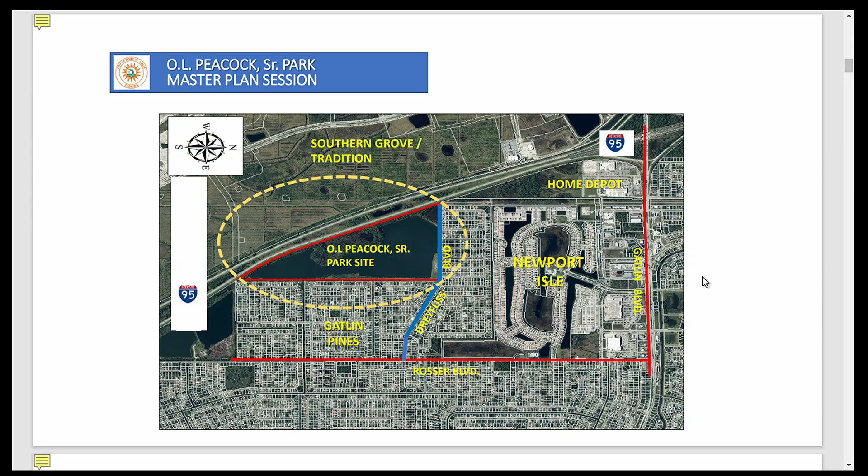By way of background, the OL Peacock Park is located in Western Port St. Lucie, adjacent to I-95, a little bit west of Rosser Boulevard along Dreyfus Boulevard, south of Gatlin Boulevard. The site is 165 acres. Don't let that get you excited, because 102 of that is water. It's an old borrow pit used to develop much of Port St. Lucie in the 1990s and early 2000s, closed out in the latter 2000s.

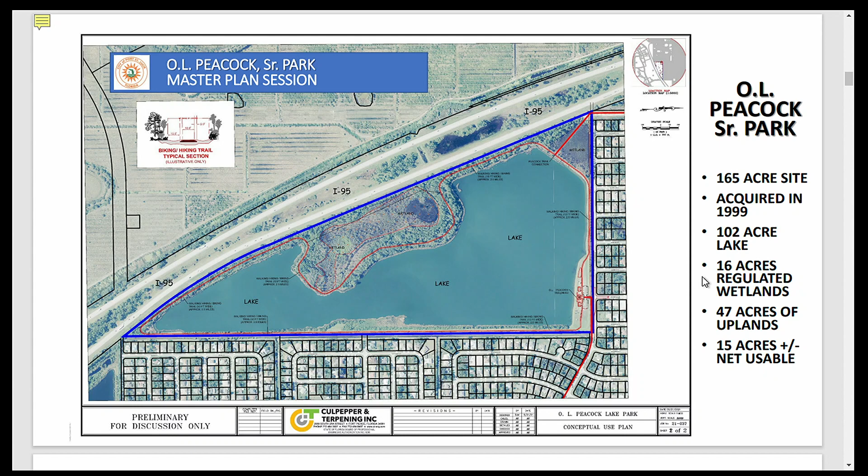There are about 16 acres of wetlands existing on the property, and 47 acres of upland. But again, looks can be deceiving. Of that 47 acres—and this is what makes this site a challenge—only about 15 acres are considered net usable acreage.

Back in September, we held a community workshop, similar format, where we asked participants a series of questions about what they would want to see on this property. Survey comments were collected via online submission from September 2021 through October 13th, 2021. The objective was to give the city guidance on how we should program the various improvements at this facility.

The tables you see in front of you are a summation of the various comments we received, and there were two broad categories of questions asked.

What activities would you like to see at the park, and what amenities would you like to see? They're similar but different. Activities are things you go out and physically partake in. Amenities are the physical improvements that allow the activities to take place.

Looking at the listings and identification of comments, there's generally a consistent comment about having a park that provided walking, exercising, and biking opportunities, areas for simple gatherings, community, neighborhood, and family gatherings, and kayaking and canoeing on the lake. The lake does permit non-motorized watercraft to access it, and it's seen as a general enhancement for the area.

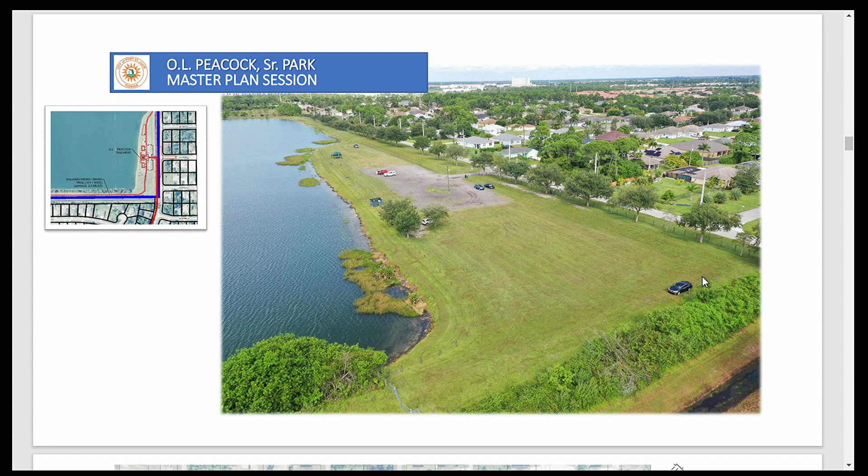There is a relatively large earthen berm along Dreyfus Boulevard with a number of mature oak trees growing into it. This area will be the foundation for the development of use activities within the park. We've divided the area along the north end of the property into two general planning groups: the east area and the west area.

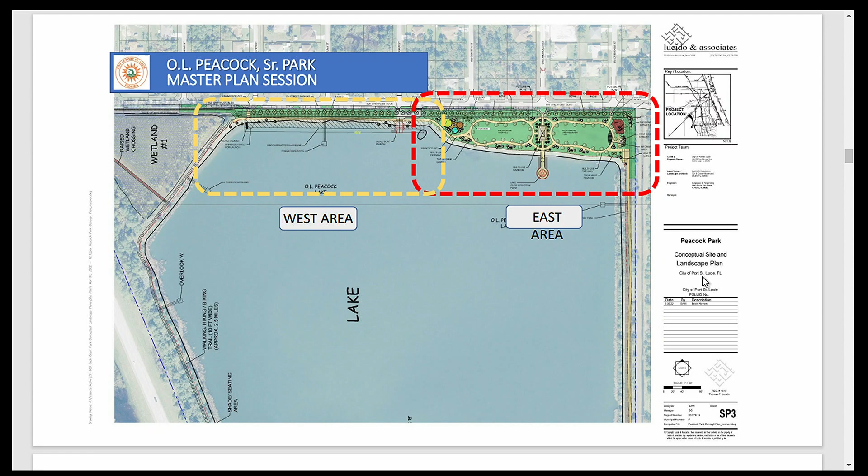The east area is essentially that portion of the property from our east property line over to where our land masses end, when you look at the site. This is the most developable portion of the property, and it's the one we're probably going to start with as we advance forward with activities.

This is the concept plan for the east area. It provides for a community pavilion, playground areas, exercise areas, water overlook areas, seating and walking areas throughout, plus general open space.

Now, one thing you'll see if you go back an image here, you'll notice there is a large unimproved area, and I'm not getting my laser... there it is. There's a large parking area that sits right here.

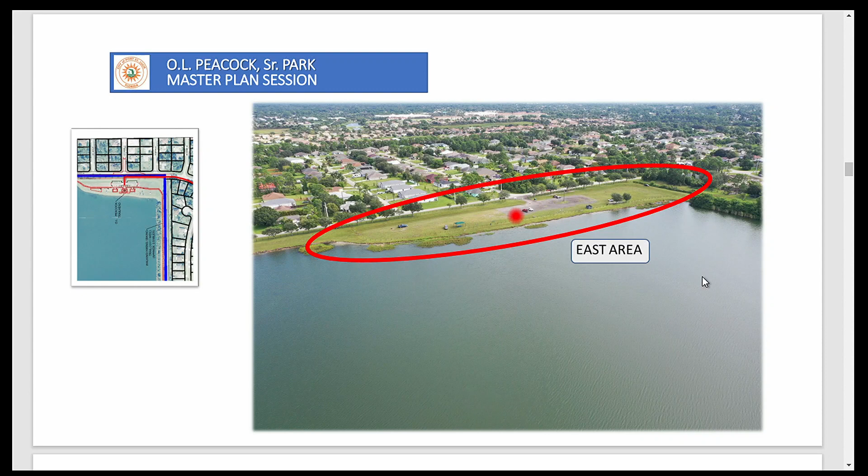When we advance back, you'll notice there is no parking on the property. That's probably one of the most significant design elements we've had to address with this facility. This plan proposes taking the existing millings parking areas inside the park that take up valuable space in a limited development area and moving them to the perimeter of the property.

This plan proposes constructing a series of on-street, parallel parking areas along Dreyfus Boulevard that will serve as primary parking for residents who cannot walk or bike to this facility. The highlighted red circles show the first areas of on-street parking. The center circle indicates where the existing driveway will be removed, and a small entry area will be proposed for landscaping improvements and construction.

As we advance through the initial stages of development, we'll have a center core of the park area with a community pavilion that can be available for use by community groups, or leased or rented for family activities. To the left and right, we'll have a child's play area on the right side with restrooms, and on the left a future athletic sports court area.

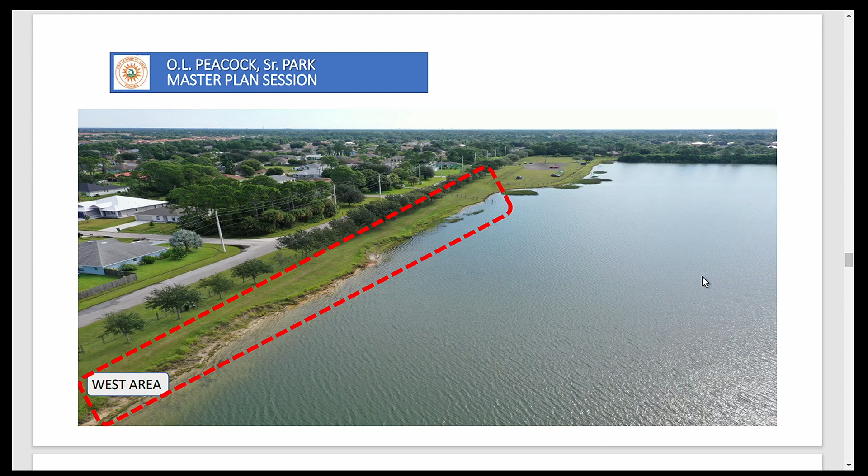That's where you see these various escarpments alongside the bank and through here. This is the area where we will, over time, be reestablishing the shoreline, regrading it out, and also providing a non-motorized boat ramp facility, a kayak launch facility, and constructing some small fishing piers for folks who wish to come out and partake in fishing. You'll also note there will be additional on-street parking added in this area.

And as I mentioned a moment ago, the ramps will be installed in these particular parts. Now that takes us across the northern portion of the property, which is the most heavily used and is likely to continue to be the most heavily used as the project develops in the future. However, as I said earlier, what I consider to be the gem of this property is the perimeter trail.

I'll touch on this. The perimeter trails go around the lake, and those will be in the latter stages of development. As previously addressed, that would provide a paved trail system that can be used for biking, walking, or hiking, with rest areas along the perimeter, open for the general public to come out and enjoy.

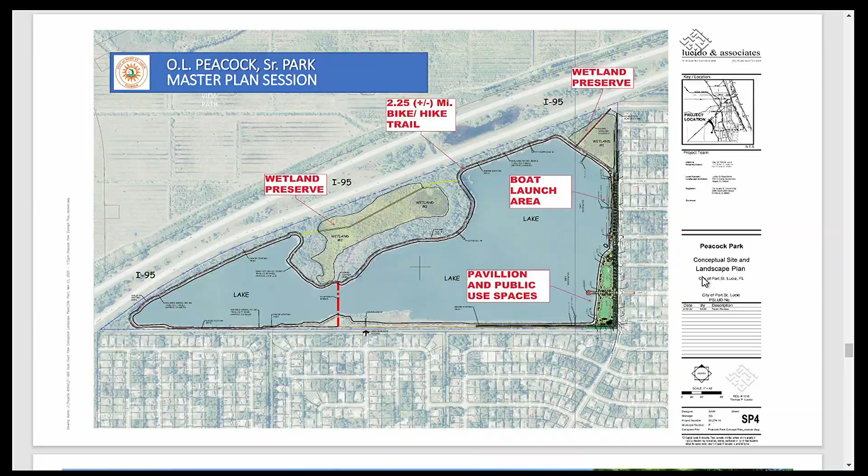Now, once we get from the concepts of the art of a master plan, where we identify and get away from the what-ifs and the pictures are put together, the next critical phase is called program scheduling. Program scheduling is where we begin to identify when we expect things to be built and how we expect to pay for them. This particular project has from the outset been envisioned as a multi-phased, multi-year project. Because of its special characteristics, it will have to be developed incrementally to make the most effective use of available resources.

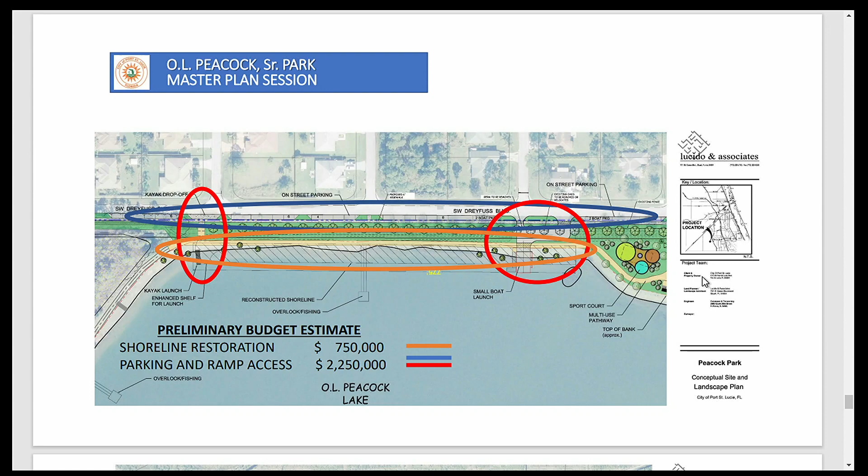When we're all said and done, the parking along Dreyfuss Boulevard will be approximately 30 to 40 vehicles. There will be ADA access for all vehicles along that entire corridor, and that includes both the east and west areas as well. That should be enough to handle most activities within the park itself.

Then we go to the trail and the piers. Now, these are going to be expensive construction items, there's no question about that. But these are the projects that create the destination value for the particular park.

Current estimates are somewhere between $3 and $3.5 million to come in and construct 2.25 miles of trail, plus associated bridging and docking systems. As I said, all of this will be dealt with in finer detail once we move into construction plans.

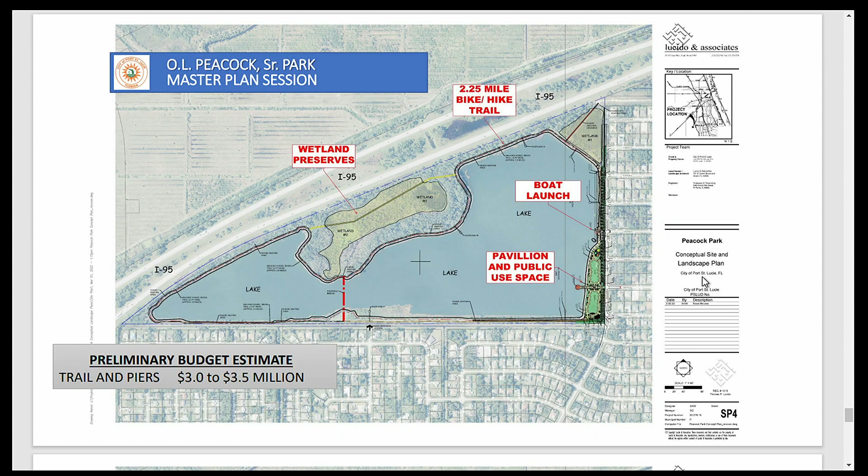So, going back to that, we have questions. Let me go back to just one element that we're talking about moving through here.

At the present time, there is no specific budget year schedule for these activities. The city is currently working on its fiscal 22-23 budget, the next year's budget, which will include some of the initial design and some of the initial construction work for the first phase of improvements, so that as the next several years carry through, we will hopefully get in a position to have a substantial portion of the eastern area completed.

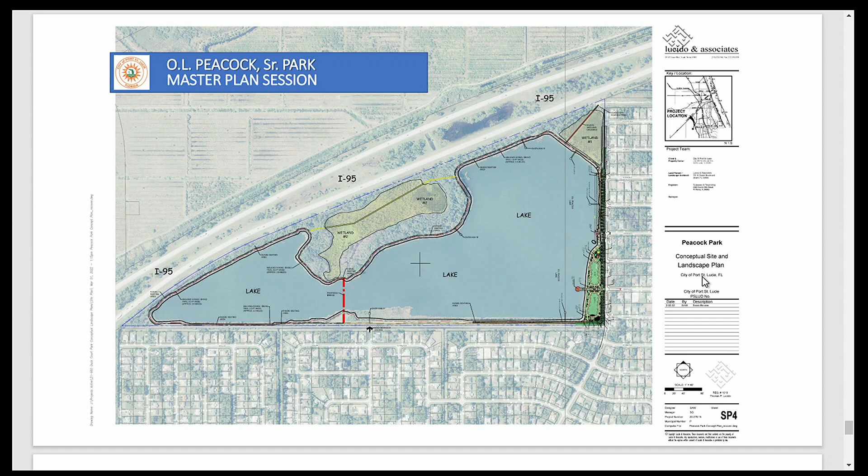That is a quick summary of the park master planning. I'm going to go back to, do you want me to go to this one, or do you want me to go to a detail sheet? I think if you went, let's go to the one that shows most of those improvements. Okay, yeah, I think that's probably, yeah.

So we'll open it up to any questions that viewers may have as to what we're showing, why we're showing it, what we didn't show, or any other suggestion. We consider this to be essentially a 60% complete master plan in terms of ideas, but if there's any additional programming or ideas, we're always open to entertaining them.

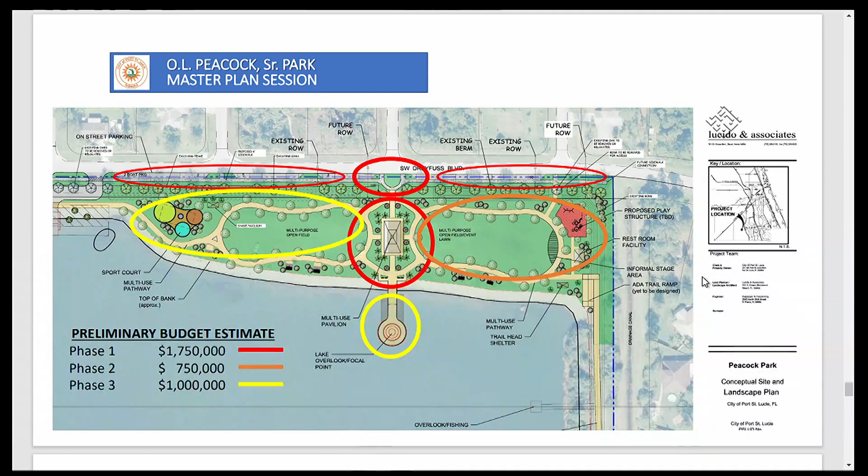Bear with me here for a moment. Oops.

Parallel parking would be located alongside Dreyfuss Boulevard, working its way down this way. When you look at the entirety of the park frontage on Dreyfuss Boulevard, we have room for about 30 to 40 spaces, depending upon the number of landscaping islands and other features we put in there. Parallel parking spaces are typically 22 feet long, 8 feet wide.

A few years ago, the city came in and along Crosstown Parkway developed a couple of exercise and walking trail stations just to the east of Bayshore Boulevard. Culpepper & Terpening was asked to come in and evaluate the best parking methods for folks who were going to use those facilities. We concluded that in that particular location, a parallel parking system appeared to be the best treatment.

That same set of conditions appears to exist along Dreyfuss, and the parallel parking modifications would be integrated into the roadway. The actual number of spaces on any one string will depend upon what supplemental street landscaping goes in to create that sense of neighborhood and sense of place that all good site designers try to achieve. Everything is ADA accessible and will meet all city and applicable federal codes for access. Hopefully that answered the question.

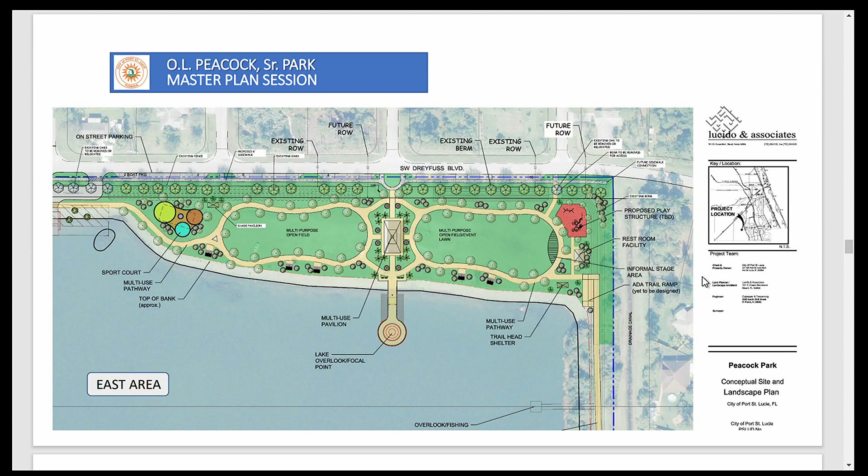Okay, great. I would offer that those activities have been going on site recently, and you may have noticed them cleaning out the Brazilian peppers on that east side just recently. That project with FWC was planned as part of enhancing the fish habitat in the area. So if you've noticed that activity, that would be part of that.

Great, thanks, Kelly. Another question received in the chat box is, what is the timing for completion of the project?

You want to start with that one? Yeah, I'll start that out, only because we are actually in our budget cycle right now, and as Dennis mentioned, the funding mechanisms have not been determined for all phases of the project. Neighborhood Services does have some funding budgeted for this next fiscal year. I believe that you're going to roll over, correct? So we'll be able to do part of a phase one.

We are working to determine exactly which amenities that's going to include now, and anticipate bringing that to the special city council meeting on March 21st, if I'm not mistaken. Yes, that is correct. So once we move past the final development of the conceptual plan, we will look to implement phase one.

As Dennis had recently shown, there are several improvements that will be looked at for phase one, but with the funding we do have available, we'll go ahead and see what can be done with the initial start of the project.

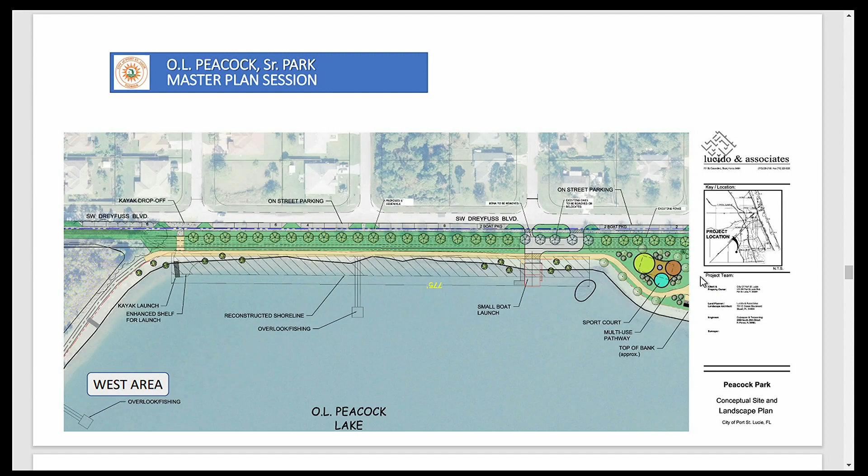All right, thank you. I only have one last question in the chat box. If you do have any additional questions, feel free to use the question and answer box. The last question is: will the fencing along the northwest portion of the park be improved to prevent ATVs from accessing the park?

We have not, through this master planning effort, identified perimeter fencing, screening, or security requirements. That doesn't mean it's not going to happen, it just means at this stage of the master plan that hasn't been fully looked into. It's a very valid question, and clearly wetland areas are typically required to be screened so that ATVs and other vehicles that can cause damage are not allowed in. That is an item I can assure you will be addressed in greater detail as final construction plans are prepared for the site.

All right, thank you, Dennis. I don't see any other questions at this time.